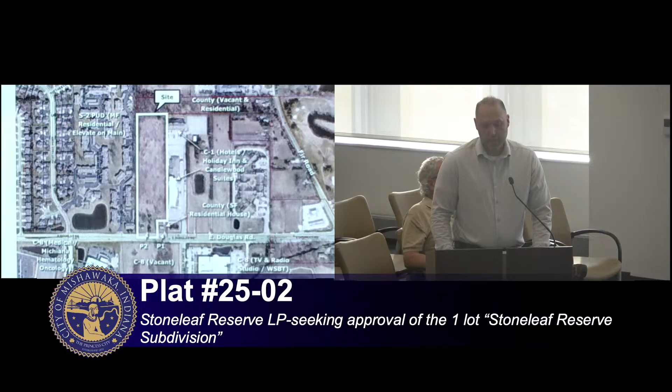Good evening. Here to present for the Stoneleaf Reserve development, some senior living spaces. I believe you're probably familiar with the project off Douglas Road, between Main Street and Fir Road. It's a 7.5 acre site, mostly vacant, with an existing residential structure and a garage that will be demolished as part of the project. The property recently was annexed into the city and zoned S2 planned unit development for a multifamily residential development.

The development will include 234 units within 3 primary buildings, each 3 stories tall, approximately 90,400 square feet total, and 50 feet in height. The development will also include an outdoor pavilion, park area, and 6 detached garage structures. There are 284 parking spaces overall, 34 of which are garage spaces. The site includes many pedestrian sidewalks, landscaping, and a dry detention pond along Douglas Road.

The project will also include a dedicated right turn lane off of Douglas Road into the development and a cross-access drive connected to the adjacent Holiday Inn development to the east. Today we're applying for plat approval. The purpose of the subdivision is to dedicate several easements.

First is to expand the existing 20-foot sewer easement along the west side of the property to 29 feet in width. This easement is in place for an existing sanitary force main that runs along the west side of the property.

Also proposing a cross-access easement that connects to the Holiday Inn property. It'll match up with an existing reciprocal easement already in place on that adjacent property, and the easement will extend through the development to the access point on Douglas Road.

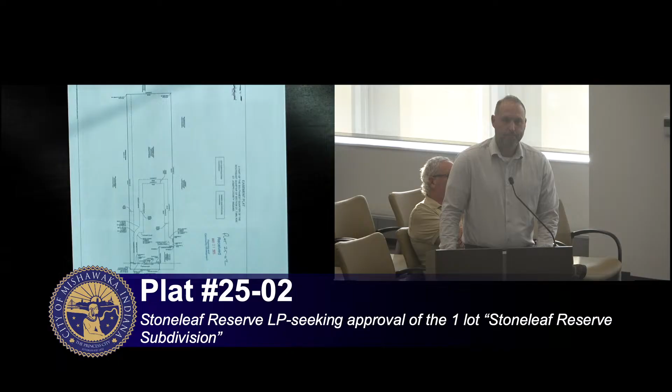Thank you for your presentation. What questions do we have? Any? Going once? Do you have pictures of the future building?

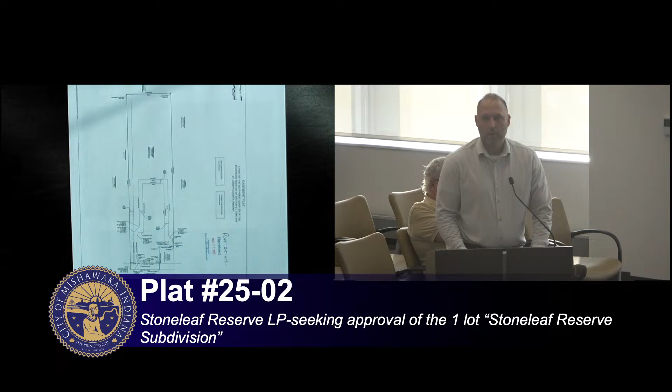We do, I was going to wait until the final site plan approval portion. Yeah, this is fair just enough, it's just the plat approval. Fair enough, no question. Thank you for the presentation.

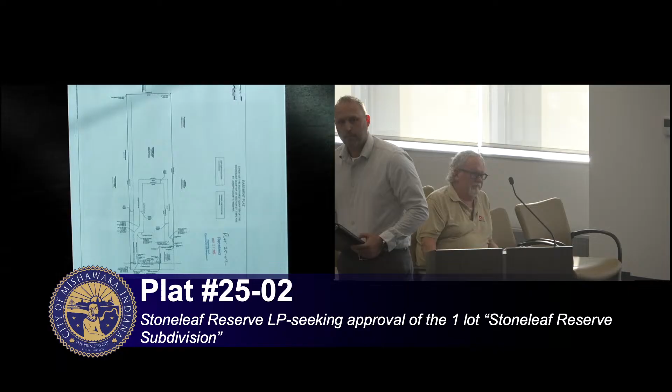Thank you. I have a question, did you say there's a plan that the neighbors can view? Is it available online? All of these are available online to look at, everything that we're looking at. So you can go to the city and look at our agenda and look at this.

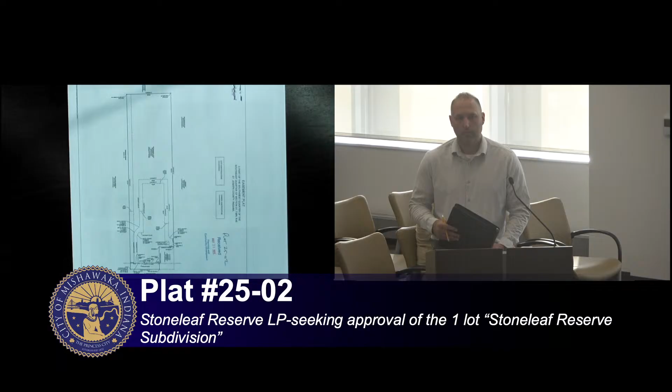Right now, we're just voting on a plat approval. It doesn't have all of the details yet, that has yet to be figured out. But anyway, we're going to continue with the meeting, and if you have questions on it, there'll be a spot coming up shortly where you can ask other questions if you have them, okay?

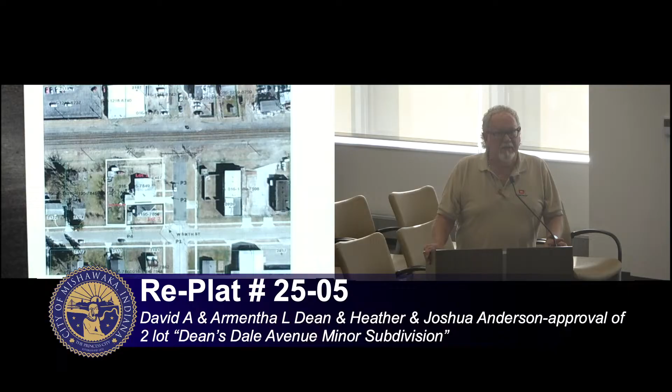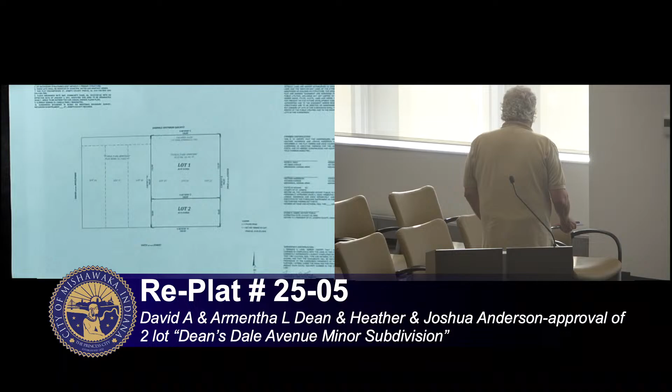Questions for Mr. Lang? No? Thank you. Is there anybody else in the room or online wishing to speak in favor of replat 25-05? Hearing none, is there anybody wishing to speak in opposition? Hearing none, is there any additional information? Mr. Spear? No further information.

Then I'll— oh, yep, I got a question for the presenter. Looking at the drawing on West Sixth Street, that subdivision falls between what street and what street? It'd be between Dale Avenue and the street to the west.

Okay, and then that is by the railroad tracks, correct? On the north is the railroad tracks, to the south is Sixth Street. It is Sixth Street, correct? Yes. Okay, and in going over this—

I don't quite understand what you're going to be putting in there, because that's not a very big space. Right now they have no space, and we're pushing that line out so they have some backyard. Okay, that's what I'm concerned about. I didn't see hardly any space, and I was just curious what you're doing and why. Just to provide more backyard space. Okay, okay.

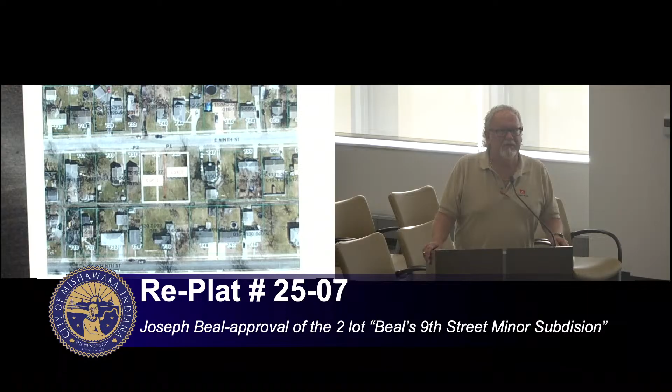Questions? No questions? Thank you for the presentation.

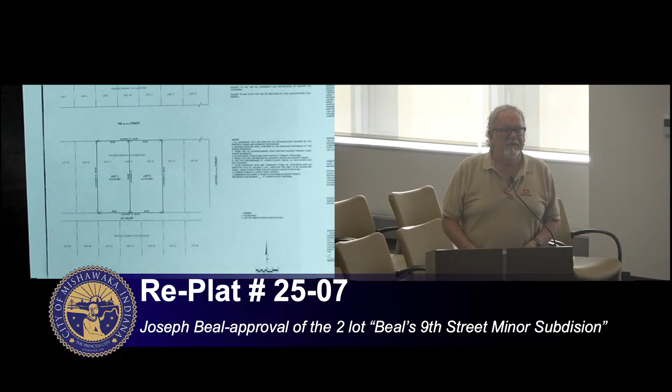Is there anybody else in the room or online wishing to speak in favor of replat 25-07? Is there anybody in the room or online wishing to speak in opposition to replat 25-07? If there's no additional information, I'll close the public hearing and take a motion on 25-07.

Make a motion to pass replat 2507. Second. We have a motion and a second. Randy was the second. Donna, would you please call for the vote?

Chris Jamrose? Yes. Woody Emmons? Yes. Drew Johnson? Yes. Randy Frost? Yes. Kathy White Gaddage? Yes. Chris Torty? Yes, and replat 25-07 passes.

Moving into site plans where there is no public hearing, we have site plan 25-02, a request submitted by 1831 East Day Road LLC seeking final site plan approval for a new auto car wash facility and existing car wash located at 1823 and 1825 East Day Road.

Hi, good evening. Chris Gadlewski, Abonmarche Consultants, 315 West Jefferson Boulevard, South Bend. I'm accompanied by Tim Schrock from Ancon Construction, and we both represent the client, 1831 East Day Road, LLC.

Some of you might have seen or heard that this went to the BZA for fence height in the rear and a couple parking spaces in the front earlier this year. Those front parking spaces are currently occupied by an ATM, which eventually at some point will go away and then the parking will be replaced.

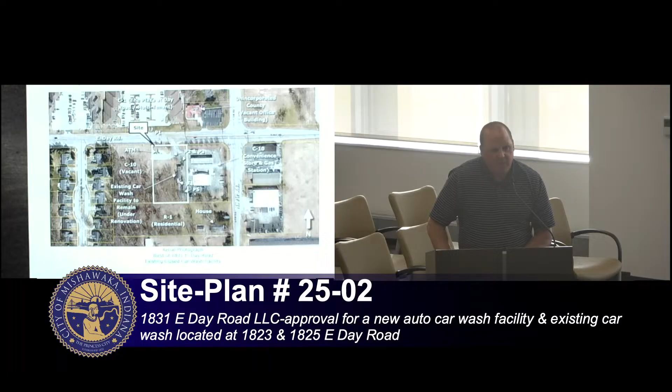Just to give you a little highlight - the addition here is a remodeled existing car wash and an enlarged second car wash with parking, landscaping, and all the other types of standards that would meet the ordinance for development.

Some of the comments provided by engineering and planning had to do with stormwater. Specifically, this is in a wellhead protection area, so we do a stormwater design that accompanies and meets the engineering standard.

And when this lot was split some time ago, some past easements were left undone with cross access and some utility easements. So with this new development, and a requirement here, we'll prepare the correct easements that need to make this development happen. One of them is including a sewer line going east through the gas station property.

And some of the other standards, design review will eventually need to happen as it relates to some of the building materials on the building. You might have seen a rendition of that. It's a very nice looking design, but nonetheless, we'll still need to go through a design review with the Plan Commission. So these are comments we're ready and willing to address, and we just ask for your favorable approval. I can take any questions you may have.

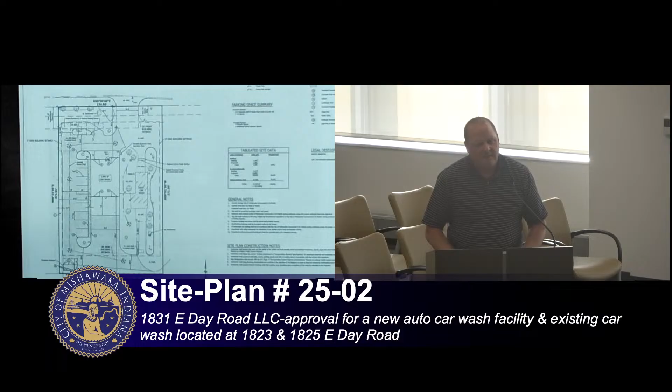Thank you. Questions for this site plan? Any questions? No? Thank you for the presentation. Thank you.

Okay, if there's no other discussions on this, there's no public hearing, so I'll take a motion on 25-02. I make a motion to approve 25-02. Second. That was Randy and Drew. Donna, would you please call for the vote?

Chris Jamrose? Yes. Woody Emmons? Yes, please. Drew Johnson? Yes. Randy Frost? Yes. Kathy White Gaddage? Yes. Chris Torty? Yes, and site plan 25-02 passes.

Thank you. Moving on, the last item on the agenda is also a site plan, 25-03, a request submitted by Stoneleaf Reserve LP seeking final site plan approval for a 234-unit affordable senior apartment complex located at 15503 Douglas Road.

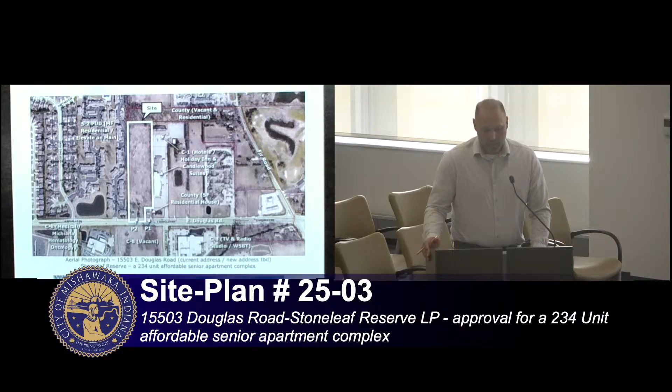Kind of went over the highlights a few minutes ago. If we can pull up the site plan there. We did recently receive some minor comments from city staff, and the intent is to meet all the city requirements and to work closely with the city to address any remaining items.

And we're not seeking any additional variances or anything else with the development. Happy to go through any questions you do have on the actual development itself and the layout. We appreciate your consideration.

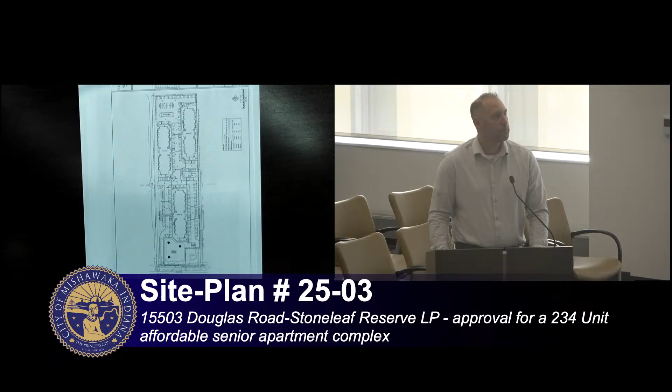Sounds good. Questions on the site plan? No questions? Thanks for the presentation. Thank you.

Okay, with that, I'll go ahead and take a motion on 25-03. Motion to pass site plan 2503. Second. We have a motion and a second. Second was Woody. Donna, would you please call for the vote?

Chris Jamrose? Yes. Woody Emmons? Yes. Drew Johnson? Yes. Randy Frost? Yes. Kathy White Gaddage? Yes. Chris Torty? Yes, and site plan 25-03 passes.

Thank you. Is there any old business, Mr. City Planner? None. New? None. Privilege of the floor for anybody tonight? Oh, people were standing up. I thought we were going to get people to speak for privilege of the floor. Oh, have a good evening.